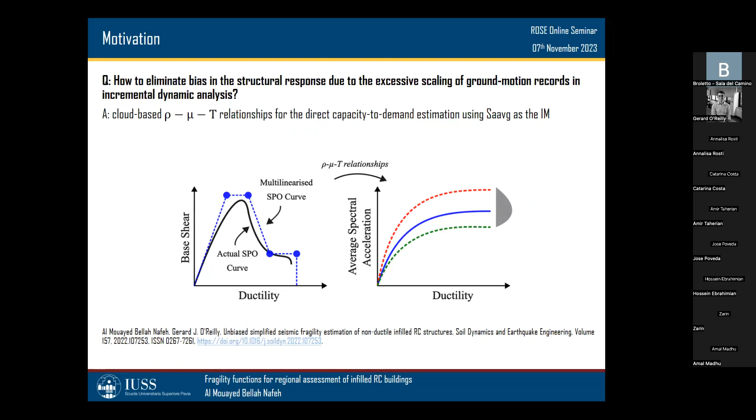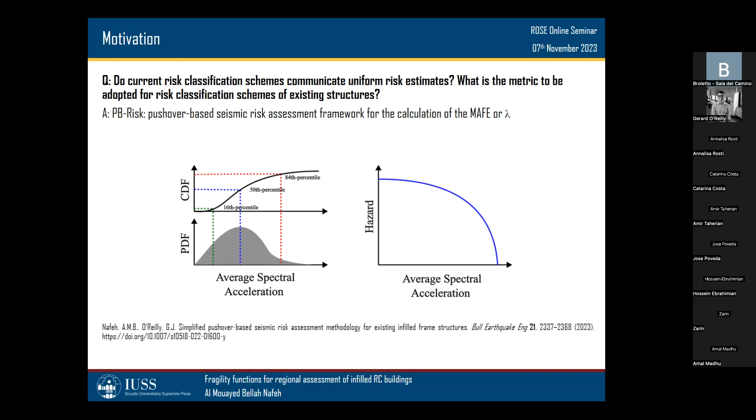The answer is no, they do not communicate uniform risk estimates due to the implemented force-based quantities, such as PGA capacity over PGA demand, in some of the guidelines. So we tried to remedy this by deriving a simplified pushover-based framework named PB-risk for the estimation of seismic risk, which is expressed in terms of the mean annual frequency of exceedance. And this integrates the average spectral acceleration, which I will call average SA from now on, as the interface between vulnerability and hazard.

The third question was, can we estimate robustly and more efficiently the direct economic losses due to earthquake events? We derived a simplified loss assessment procedure termed PB-loss, which integrates generalized story loss functions with the previous tool and framework for the direct estimation of seismic losses. These three procedures have demonstrated an acceptable trade-off between accuracy and computational demand, and most importantly, consistency and reliability.

But what do they all have in common? The common factor was the SA average as the main intensity measure. It was always considered as the interface between hazard and vulnerability.

The average SA was first introduced in the early 2000s as an efficient intensity measure for response prediction. Ever since, many studies have pointed out its high efficiency, sufficiency, and practicality properties. It is defined as a geometric mean of the spectral accelerations at a set of oscillator periods of interest, considered to be appropriate for estimating multiple structural response metrics that are critical for risk assessment and loss estimation of the structure.

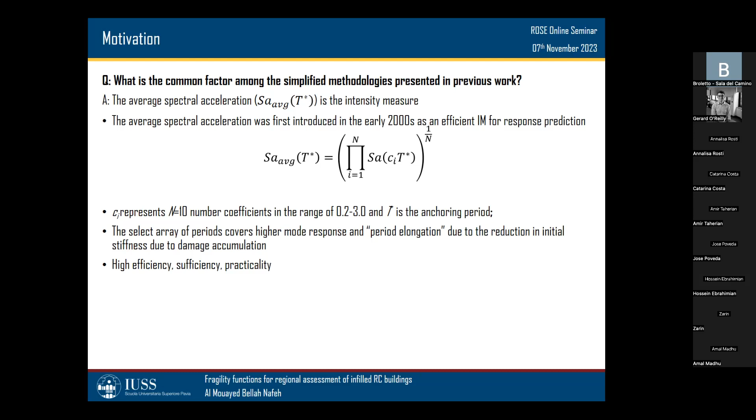So the question today is, can we derive reliable analytical fragility functions for the regional assessment of infilled RC frame buildings using average SA?

To get started, just a bit of setting out the groundwork here with general notions. Fragility curves or functions quantify the exceedance probability of any structural demand-based performance level or limit state as a function of the ground shaking intensity. This could be PGA, SA at T1, or average SA.

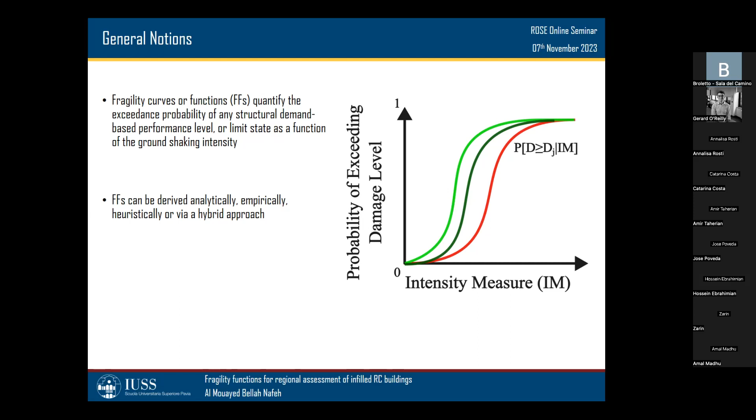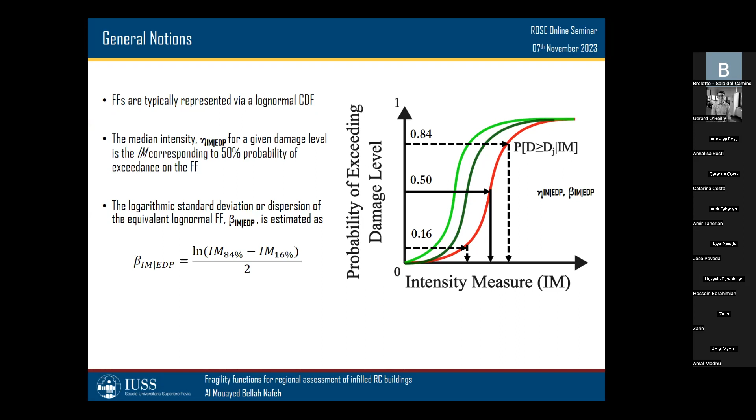Fragility functions are derived either analytically, empirically, heuristically through expert judgment, or via a hybrid approach. These fragility functions are typically represented via a log-normal cumulative distribution function with a median intensity and a logarithmic standard deviation, or dispersion.

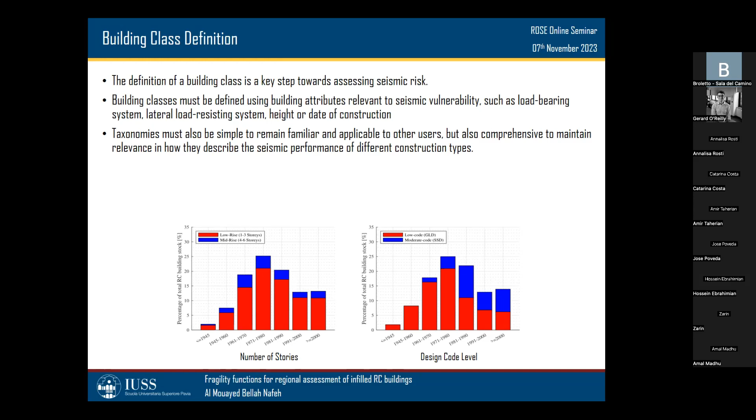A key step in the derivation of analytical fragility functions first requires the definition of building classes. Building classes and taxonomies must be defined using building attributes that are relevant to seismic vulnerability, such as load-bearing system, height, or date of construction. Taxonomies must also be simple to remain familiar and applicable to other users, but also comprehensive enough to maintain relevance in how they describe seismic performance of different construction types.

Based on national census data for Italy, we have identified 4 building classes prominent within the regional building stock, namely low-code low-rise, low-code mid-rise, moderate-code low-rise, and moderate-code mid-rise infilled RC buildings. These building classes were identified based on two prominent features, as you might have guessed: the number of stories and the design code level.

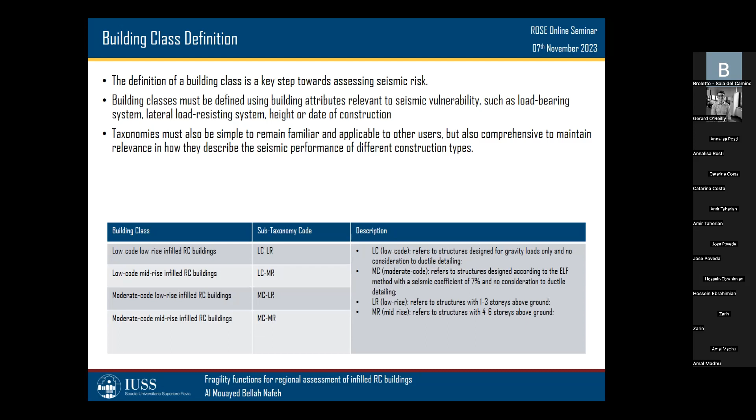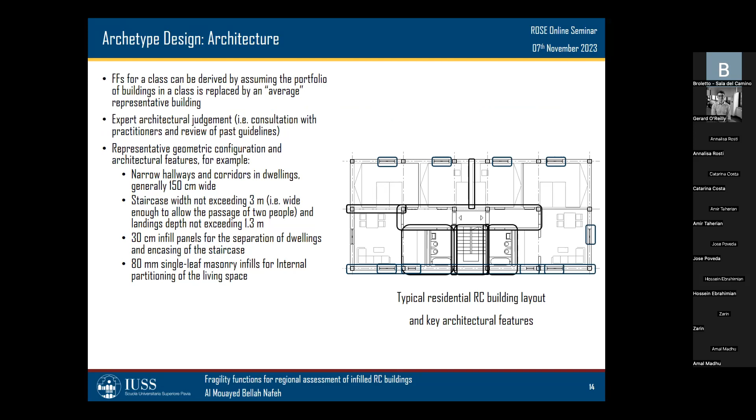After identifying our building classes, assessing the seismic performance of structures generally involves analyzing numerical models referred to as archetype building models. Archetype models are based on essential aspects, and these aspects should consider a wide range of key architectural features representative of the regional context and the corresponding design practices: the gravity and lateral load-bearing structural system, variability in material properties, occupancy type, intended use, building height, elevation, and plan configuration, etc.

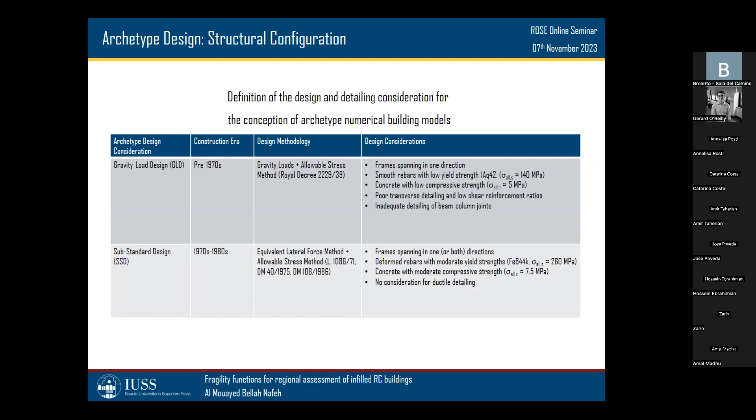Therefore, for this study, we used the database of archetype building models for infilled RC frame structures, which was previously developed in previous studies. This database considers two temporal design practices, namely pre-1970s or low-code, where buildings were designed to resist gravity loads only with no consideration to ductile detailing, and post-1970s or moderate-code, where seismic design was carried out with respect to the equivalent lateral force method, where a lateral force coefficient of about 7 to 10% was typically considered depending on the seismic zonation we're in. For this application, a seismic coefficient of 7% was considered.

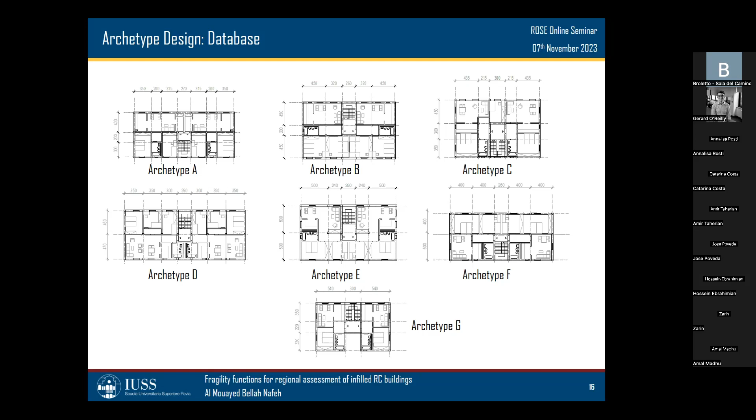Numerical models of the archetypes were developed in OpenSees using a 3-dimensional lumped plasticity approach. Empirical calibrations from various sources were employed to determine strength, deformation capacities, and hysteresis parameters for different member types such as beams, columns, beam-column joints, and infill panels.

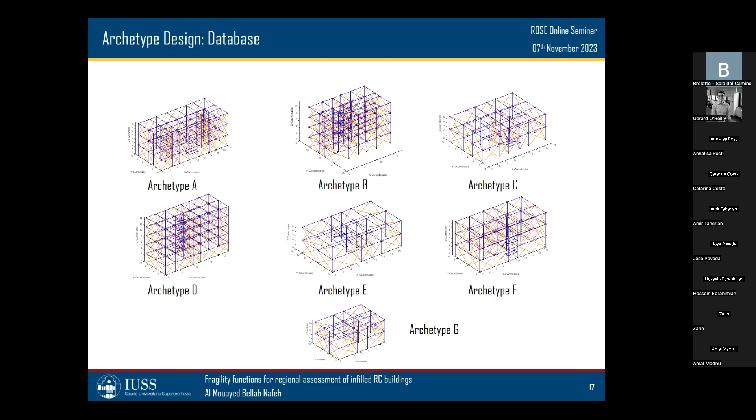Following the definition of numerical models and before running any sort of analysis, probabilistic seismic hazard assessment must be carried out to characterize earthquake rupture sources at a specific site of interest and to identify the relationship between these rupture characteristics and the intensity of ground shaking via an intensity measure.

OpenQuake was used to conduct PSHA, where the annual rate of exceeding an average SA level at a given site is obtained. In this study, the archetype buildings were assumed to be located fictitiously in the city of L'Aquila in Italy. The most recent European seismic hazard model, ESHM20 for short, was used with the site characteristics presented by Mori et al. to estimate the hazard curves for different definitions of the average spectral acceleration.

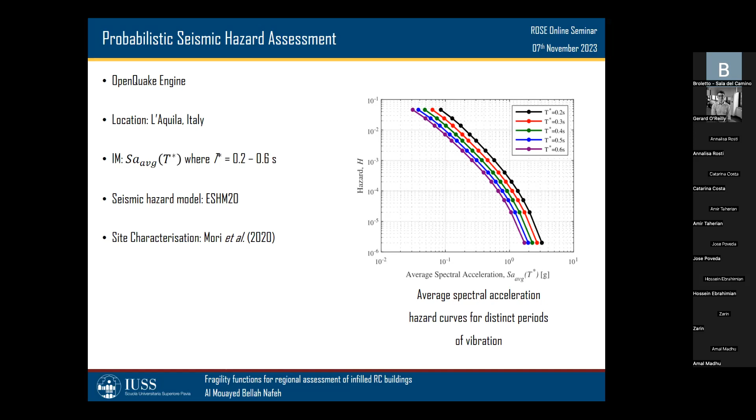Next, the derivation of fragility functions requires the ability to accurately quantify the exceedance of any structural demand-based damage state. Damage states are widely used in seismic risk applications to relate observed structural damage to consequences like building functionality, economic losses, and possible casualties. In practice-based applications, damage states are typically referred to as limit states and are triggered by several potential factors, both on a local and global level.

This can be either global displacement-based, local deformation-based, or local strength-based criteria. For example, the Italian National Code, or NTC 2018, identifies 4 limit states based on the lateral capacity of the main structural system.

Since the typology under consideration in this work is non-ductile infilled RC-frame buildings, these damage states are also impacted by the premature failure of the infill panels and the degradation in strength due to the in-plane, out-of-plane interaction. However, in this study, we focused mainly on the in-plane failure of the masonry panels, and experimental tests carried out by Kurukulasuriya et al. demonstrated that for infilled RC-frame buildings, the initial damage states are governed by the in-plane drifts sustained by the infill panels.

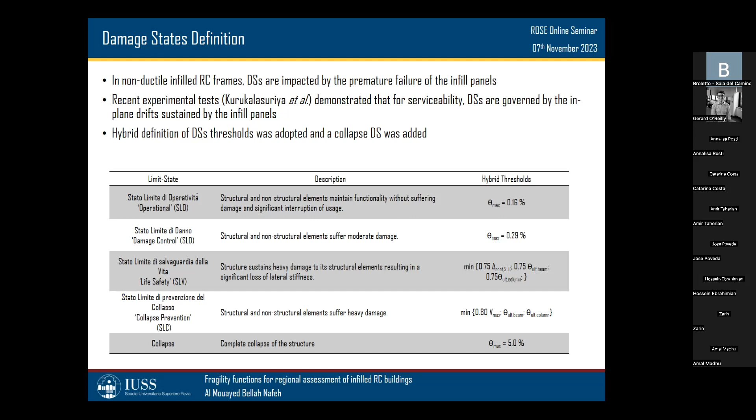These correspond to story drift values of 0.16% and 0.29% for the operational and damage limitation limit states. To account for this, a hybrid definition of damage state thresholds was adopted in this study, where the findings of Kurukulasuriya et al. were adopted for the operational and damage limitation limit states, and NTC 18-based guidelines were adopted for the definition of the life safety and the collapse prevention limit states. An additional collapse limit state was considered, where complete structural collapse is expected, taken to be when 5% story drift is exceeded in nonlinear dynamic analysis.

A series of multiple stripe analysis using hazard consistent ground motion records at discrete intensity levels was carried out to individually characterize the nonlinear dynamic response of the archetype buildings. But before that, hazard disaggregation analysis following PSHA was carried out to identify the most representative rupture scenarios for a given IM and return period.

A suite of 25 records per intensity was selected using the toolbox for ground motion selection and processing, EzGM. This was carried out considering 5 conditioning periods, T star, for average SA, which were in the range of the geometric mean of the first mode periods of vibration of each building. 9 intensity levels corresponding to return periods of 22 to 4,975 years were analyzed to characterize structural response from initial damage all the way to global structural collapse, while keeping the scaling factor threshold for record selection at 2.

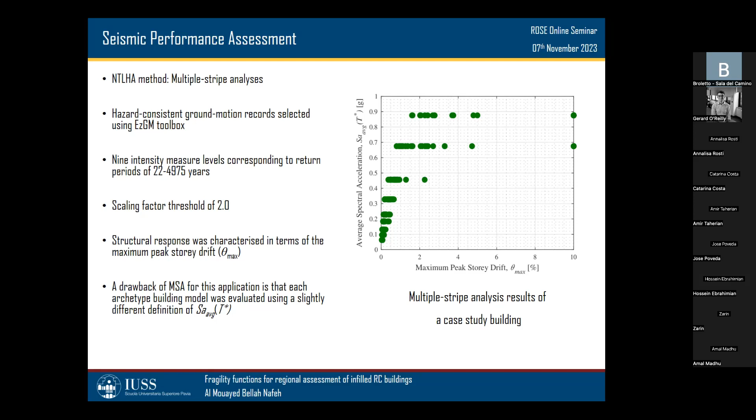The analysis was carried out. However, a drawback of multiple stripe analysis within this context and this application is that each archetype building model was evaluated using a slightly different definition of average SA. To remedy this, we've opted to use a single definition of the conditioning period for buildings belonging to the same class. This enables us to characterize an entire building class under a single definition of average SA.

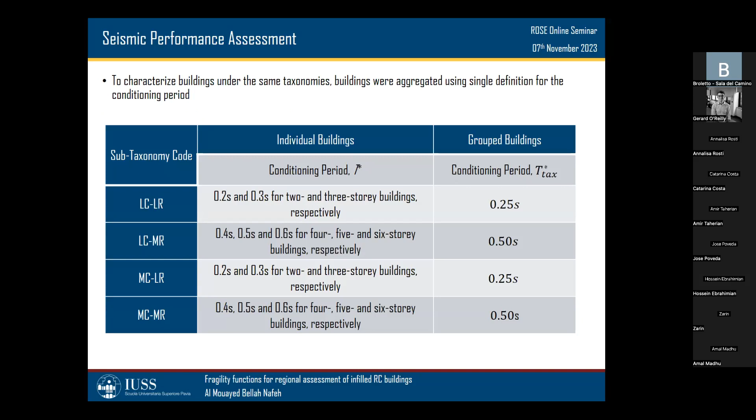As a result of the building grouping, results of MSA carried out on individual buildings would change, given the shift in the intensity measure definition from multiple definitions of average SA to a single one. Therefore, new spectral intensities should be identified. We try to do that without rerunning the analysis by simply calculating the intensities from the spectra of each individual ground motion record, and no changes to the EDP values were necessary.

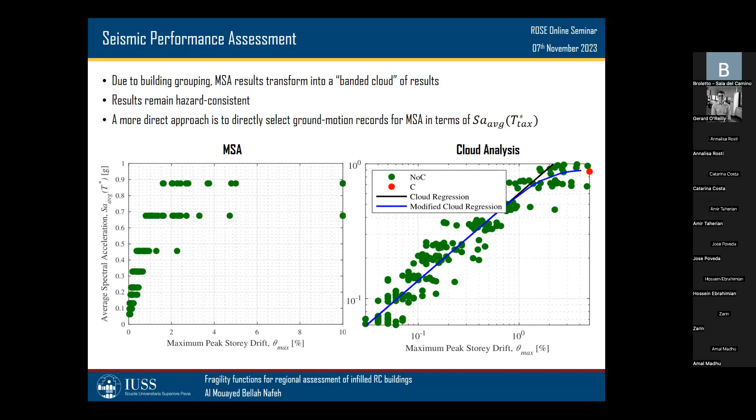Now, to identify the median intensity and associated dispersion corresponding to a demand-based threshold for a single building case, our application becomes similar to that of cloud analysis, where a linear regression in the log space is carried out to identify an IM given EDP relationship, and the median intensity is obtained by intersecting graphically the regressed line with a vertical line representing the demand-based threshold and reading off the value on the y-axis. The associated dispersion, or in this case, the record-to-record variability, is simply the error in the fitted regression.

On an asset class scale, the previous exercise is repeated until all median intensities corresponding to all damaged states for all buildings are collected. The seismic intensity of a building class for a given damage state is simply the mean of individual seismic intensities at that damage state.

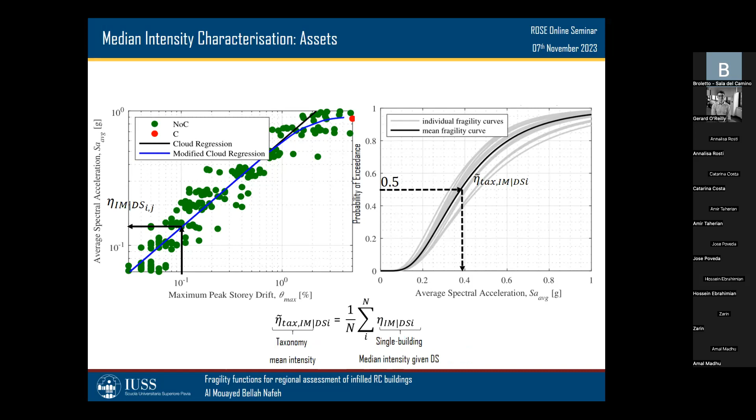As far as uncertainties are concerned, the seismic performance assessment of any given structural typology requires due consideration to both aleatory and epistemic sources of uncertainty. In the study, the overall dispersion associated with the mean log normal fragility functions of each taxonomy was derived as per the law of total variance by considering the intra-building, inter-building variabilities, and the modeling uncertainty.

The intra-building variability considers the overall record-to-record variability, and this simply becomes the arithmetic mean of the observed record-to-record variability of all the buildings within a class, and is therefore a constant value since the error associated with the regression is itself a constant value.

The inter-building variability is simply put the deviation of individual median intensities of each building within a class from the mean seismic intensity for any given limit state. So it's basically how far the medians are with respect to the mean intensity that is characterizing our building class at that particular damage state.

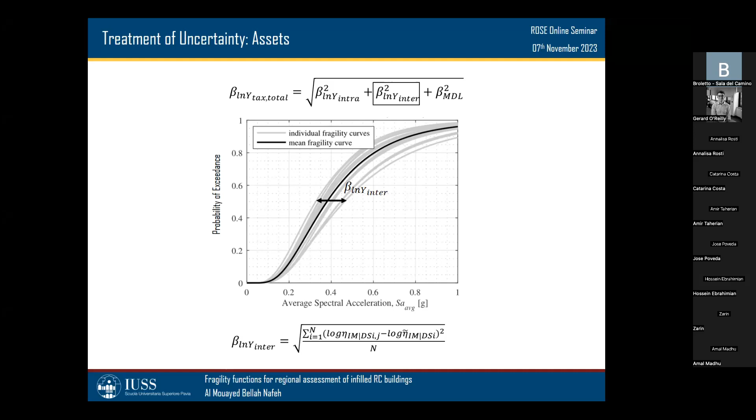The last source of uncertainty is associated with numerical modeling and the parameter values used in the modeling process, which can be related to material property, geometric configuration, and other numerical assumptions.

To quantify the propagation of modeling parameter type uncertainty to the overall dispersion, a value of 0.34 was assumed according to a study conducted by O'Reilly and Sullivan for 2 to 6 story infilled RC buildings.

After identifying the key components of fragility functions, analytical fragility functions can now be derived following the assumption of log normality, which implies that the IM values of ground motions causing damage state exceedances are log normally distributed. This is a common assumption demonstrated in various studies throughout the literature, and the functions are illustrated on this slide.

Verifying analytical functions with past earthquake events is a crucial step in the development of these functions in earthquake engineering. The verification process aims to assess the robustness of what we just derived in casting future damage predictions.

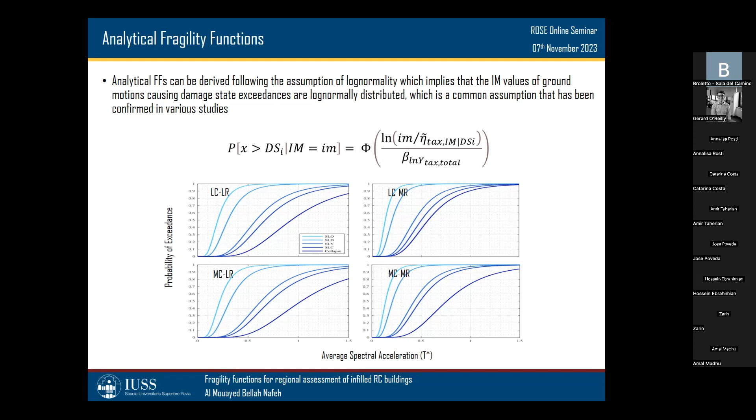To do so, empirical fragility functions obtained from observed damage after the occurrence of a significant earthquake event are invaluable.

Empirical fragility functions, similar to analytical ones, are models derived from pairs of observed damage and intensity data for buildings and infrastructure. On the x-axis, we indirectly have the intensity measure values at points of interest, obtained either through field surveys or numerical simulations using ground motion models. The y-axis indirectly relates to the damage data collected for a group of surveyed and spatially distributed exposed assets.

Additionally, verification events should be statistically suitable and significant. This means that a wide range of ground motion intensities and scenarios should be covered to ensure the robustness of fragility functions across different conditions.

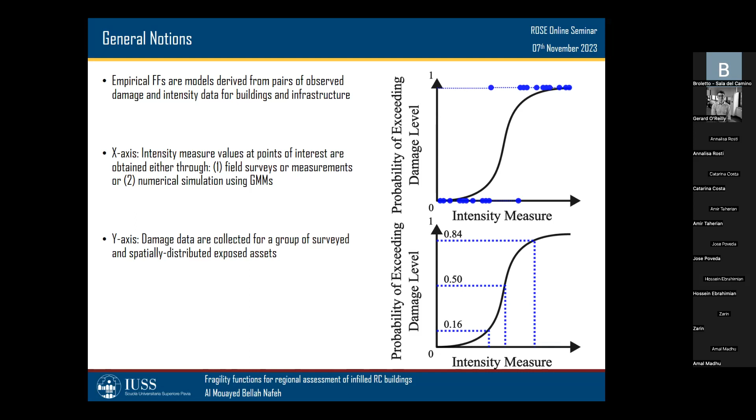In this study, two seismic sequences were considered. The first being the magnitude 6.2 Umbria Marche earthquake of 1997, which in its aftermath, unfortunately, took the lives of 11 people, left hundreds injured, and at least 80,000 displaced.

The second considered event is the magnitude 6.3 L'Aquila event of 2009, with almost 308 fatalities, 1,500 injured, almost 66,000 displaced, and costing $16 billion in economic losses.

The first step in deriving empirical fragility functions is to map the intensities associated with the rupture scenario that occurred. For this purpose, ground motion fields, or GMFs, are derived following an earthquake event using ground motion models, or GMMs. GMFs associated with significant events are very important to our application as they provide assessments of potential damage and community exposure.

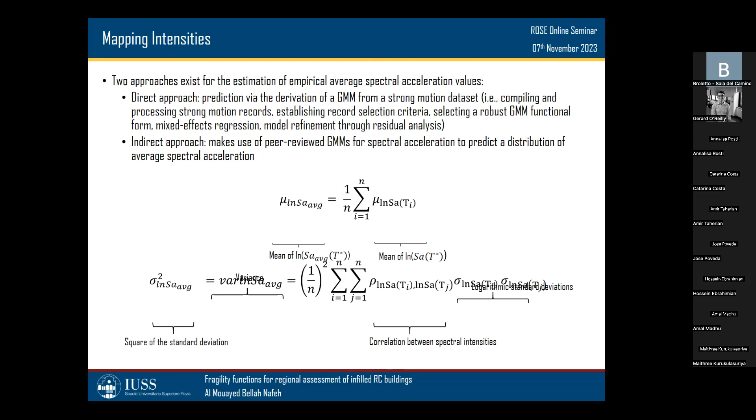If we dissect the mean of the logarithm of average SA into multiple spectral acceleration values, we refer to the GMM proposed by Bindi et al., which was used to evaluate these spectral intensities, as it was derived to estimate them at distinct periods ranging from 0.04 to 2 seconds. The GMM also allows estimation of ground shaking intensities such as PGA and SA, corresponding to magnitude range of 4 to 6.9, which our events fall within, and distances of up to 200 kilometers. The prediction using ground motion models generally, and Bindi et al. specifically, is based on earthquake magnitude, source-to-site distance, local site conditions, and fault mechanism functions.

But before applying any ground motion model to produce ground motion fields, careful comparison of observations to various numbers of standard deviations on either side of the mean prediction is necessary. To help account for this deviation, a new technique titled ground motion model conditioning can provide additional constraints on the ground shaking estimates in the region affected by the earthquake.

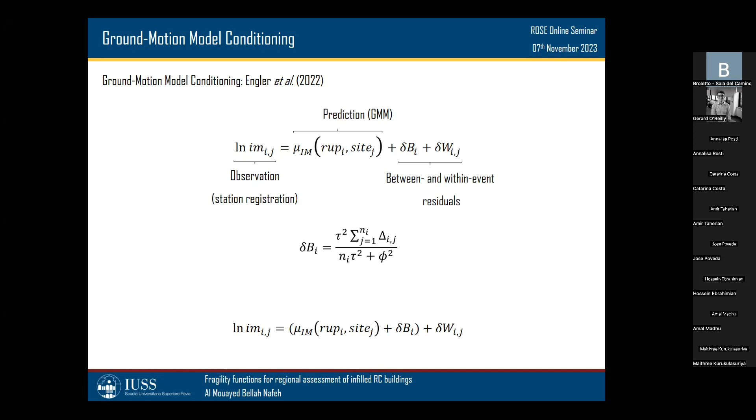This is done using the ground motion recordings from stations, or what is termed ground truth. The conditioning of the ground shaking is based on the methodology developed by Engler et al. 2022, which preserves the partition of the within-event and between-event residuals, thus enabling more accurate propagation of uncertainties through a Monte Carlo simulation approach.

So for each IM of interest, mixed effects residuals are computed using the following formulation, commonly referred to as residual partitioning, where the between-event residual is recomputed using the recorded data and reinserted into the equation above. The GMM then becomes an event-adjusted ground motion model that we can use to simulate realistic intensities given the rupture scenario that has occurred in the past, following the applied constraints.

Mu IM and delta B are now grouped into what is commonly referred to as an event-adjusted mean, and delta W represents the residual between the observations and the event-adjusted mean. The GMM conditioning may not always inflict significant changes on the non-conditioned GMM, yet it still remains a suitable step to carry out to inject some reality through instrumental recordings into the prediction.

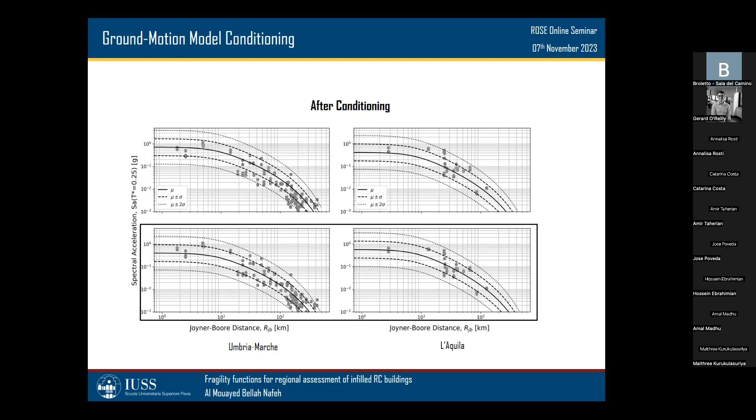Moving on to spatial correlations. Spatial dependence among ground motion typically impacts predicted consequences to spatially distributed assets. This correlation considers the spatial dependence in the joint probability distribution function of an intensity measure given a rupture scenario. It was observed through many studies that considering spatial correlation yields the most accurate estimates. Hence, a model that does not account for spatial correlation may imply that larger than median motions would occur at individual locations if considered independently.

The spatial correlation model for the average SA that was derived by Heresi and Miranda in 2021 was adopted in this study. Several phenomena associated with earthquake rupture and wave propagation can produce spatial correlation in the within-event residuals. This can be due to the simplicity in the source description of ground motion models, site effects, geomorphological conditions of the considered regions, etc.

Having assembled the key components for generating ground motion fields, the intensity at each site within a controlled polygon or grid, for a given rupture event, is simulated using a multivariate normal distribution for the logarithm of the intensity measure, in this case, the SAs.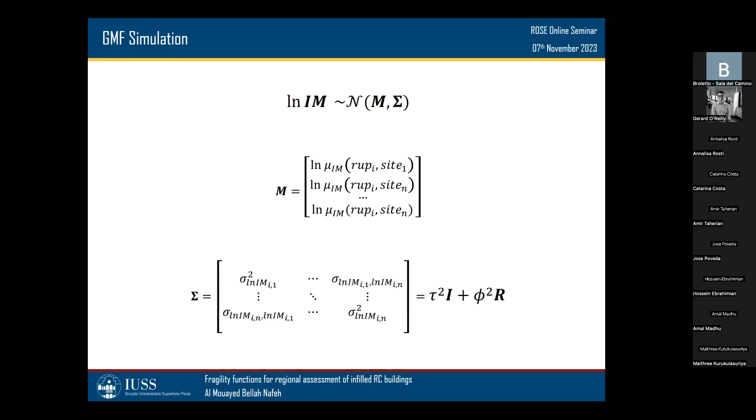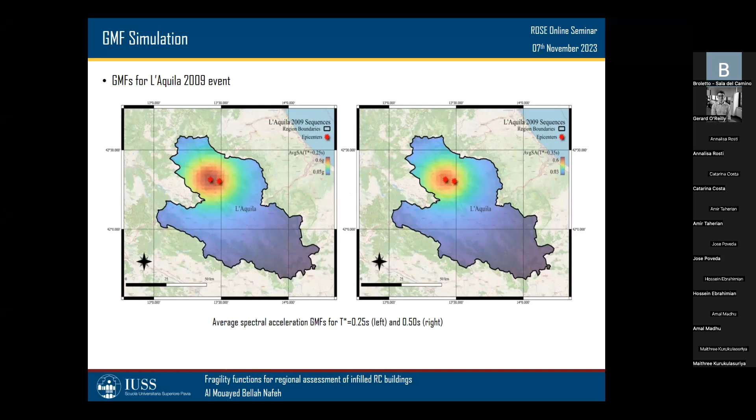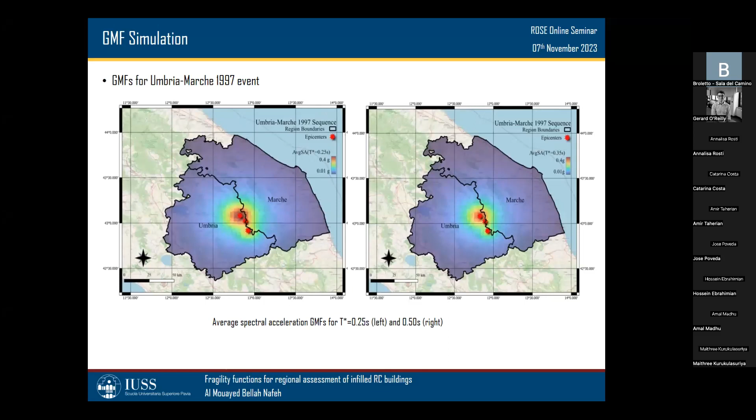Now, the ground motion fields corresponding to the two case study sequences were derived, where the average SA fields are plotted alongside the epicenters of the earthquake events considered within the sequence. These intensity fields represent the mean ground shaking intensity corresponding to 10,000 simulations that were carried out, demonstrating the ground motion fields for the L'Aquila event and for the Umbria Marche event.

I deserve the water break.

Now, the second component of empirical fragility functions is to assemble empirical damage observations corresponding to the considered event. This data represents an invaluable source of information. Over the last 50 years, a notable amount of data relevant to post-earthquake damage to existing buildings was collected following earthquake events in Italy. This data was stored in a database of observed damage called the DADO. DADO is an IT platform and database which includes information on the structural characteristics and the observed damage to buildings inspected after the most relevant seismic events that occurred in Italy from the Friuli 1976 earthquake onwards.

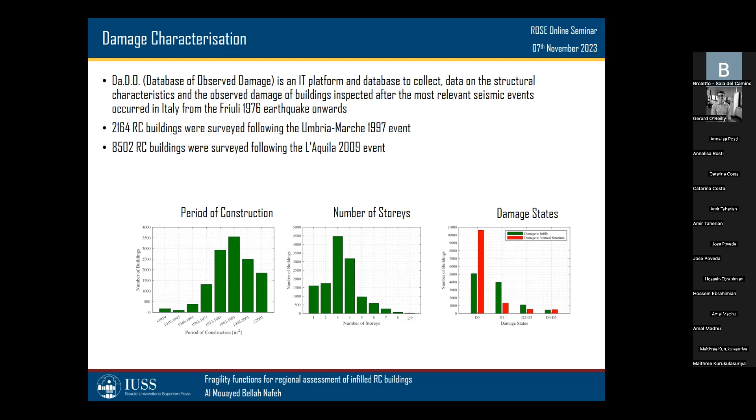The DADO database includes information on 2,164 RC buildings following the Umbria Marche 1997 event, and information on about 8,500 RC buildings following the L'Aquila 2009 event.

The damage state data were collected according to the AeDES survey, which is a subset of the European macroseismic scale, or EMS 98. AeDES identifies four damage states composed of 6 damage levels, ranging from D0 to D5.

Before 1997, damage data were collected mainly with regards to the state of the vertical structure, such as in the Umbria Marche event. Following 1997, new extensive damage categories were included in the survey to reflect the state of non-structural elements that can be present in a building, such as infilled panels.

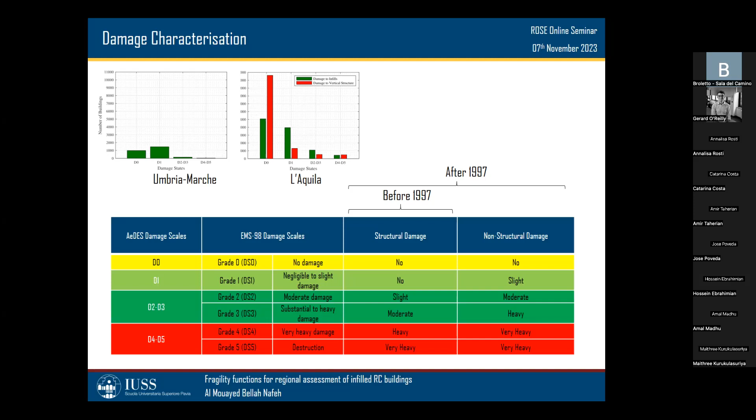However, in order to adequately validate analytical fragility functions with empirical fragility functions, an equivalency is required between the hybrid limit states established in the previous section and the AeDES damage states, to help provide a more comprehensive comparison between empirical and analytical fragility functions, and to be able to say that we're comparing apples with apples in this context. Therefore, some assumptions must be made.

In the study, the hybrid limit states adopted in the analytical fragility functions were related to the AeDES damage states as illustrated in this table. For example, we assume that D0, or the undamaged limit state, corresponds to the operational limit state in the hybrid approach. D4, for example, corresponds to the collapse prevention limit state in the hybrid limit state, and so on.

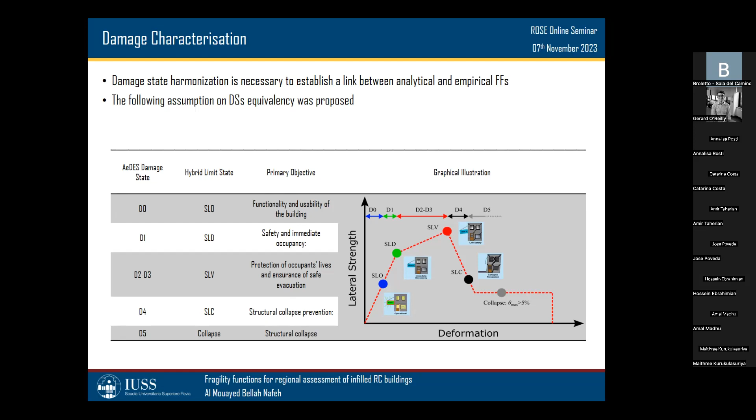Having characterized the information required for both axes on the fragility function, we now possess all the information required to fit our empirical fragility function. We're only missing the techniques for deriving such empirical fragility functions.

Given the availability of building-by-building data, we assume a Bernoulli distribution for characterizing the random component of the statistical model. This is basically the component corresponding to the y-axis on the fragility function. Y given IM, in this case, indicates whether an asset i is in damage state j. The outcome of the Bernoulli distribution is a binary outcome, meaning that for a certain damage level, all exposed assets

with an observed damage level that is D less than DI will have a probability equal to 0. For a certain damage level, all exposed assets with an observed damage level D greater than DI will have an assigned probability equal to unity. This adoption of the binary Bernoulli distribution allows for avoiding aggregation of damage data, which may introduce uncertainty and overlap in the fragility functions.

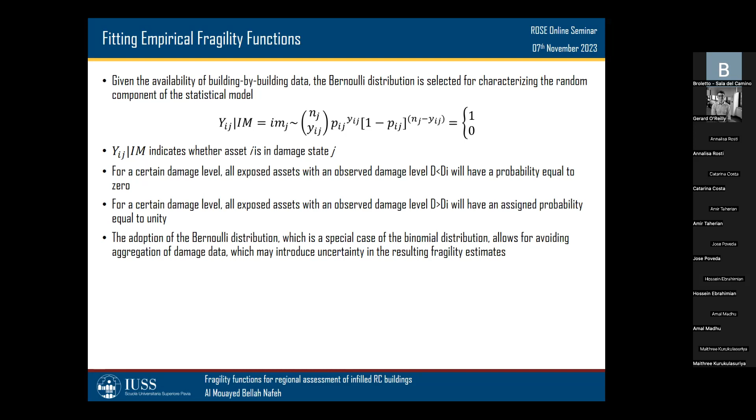Now, for the derivation of fragility functions, a further step requires an appropriate statistical model and fitting technique to approximate the observational data as a function of the ground motion severity or intensity measure level. As such, the cumulative log-normal distribution, similar to that adopted in the analytical fragility function, is adopted for describing the probability of exceeding a damage level as a function of the seismic intensity measure, where fragility functions are simultaneously fitted via a maximum likelihood estimate approach, where the optimal parameters, in this case the median intensity and the associated dispersion, result from maximizing the logarithm of the likelihood function.

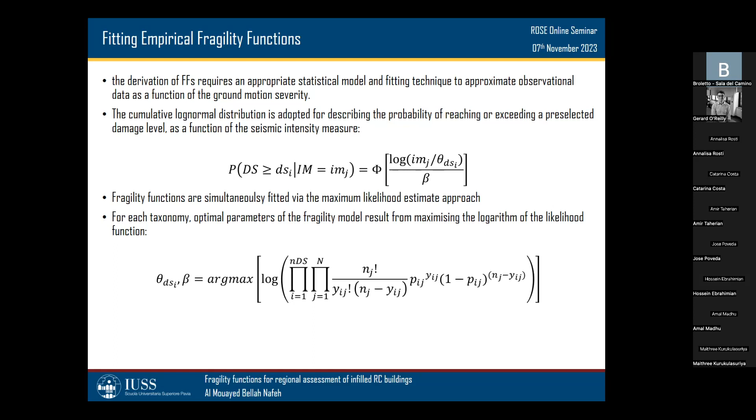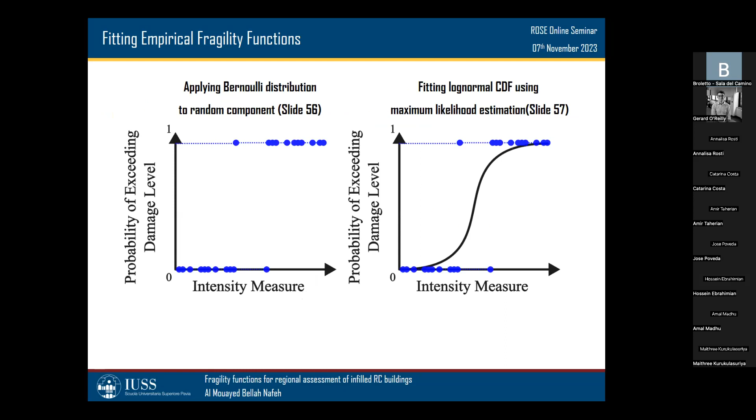Now you might be thinking, we've identified 5 damage states. Why are we seeing 4? This is the result of not having enough significant damage data corresponding to collapse in the database, unfortunately, so we cannot draw any conclusions with regards to the ultimate limit state, that is collapse.

As far as verification and conclusions, the first major takeaway of this study was the reduction of uncertainty in fragility functions that was clearly demonstrated. This is crucial for improving the accuracy and reliability in seismic risk applications. Reducing uncertainty was demonstrated to be achieved using more efficient IMs, such as average SA, and choosing appropriate IMs is highlighted to be beneficial, as the choice directly influences the robustness of the fragility functions.

The influence of the IM choice on the associated uncertainty is demonstrated in this figure, where we can see the efficiency that average SA has demonstrated with respect to other conventional IMs, such as PGA and SAT. These correspond to the dispersion associated with the empirical fragility functions corresponding to other IMs. A major improvement in efficiency was demonstrated, particularly at moderate to high damage states, such as damage limitation, life safety, and collapse prevention, where the concentration of damage initiates and propagates, and where we tend to outgrow the elastic response.

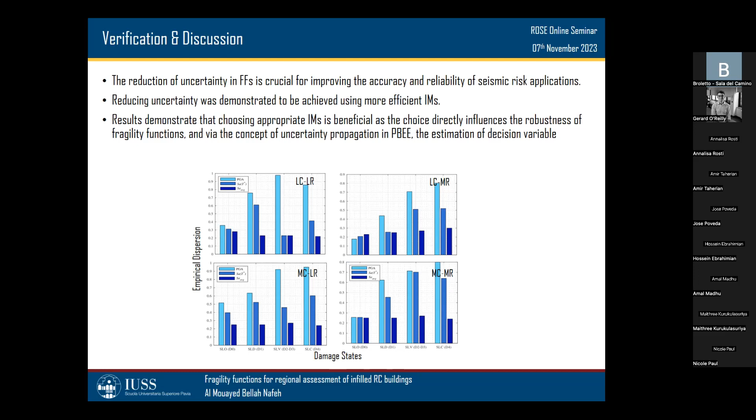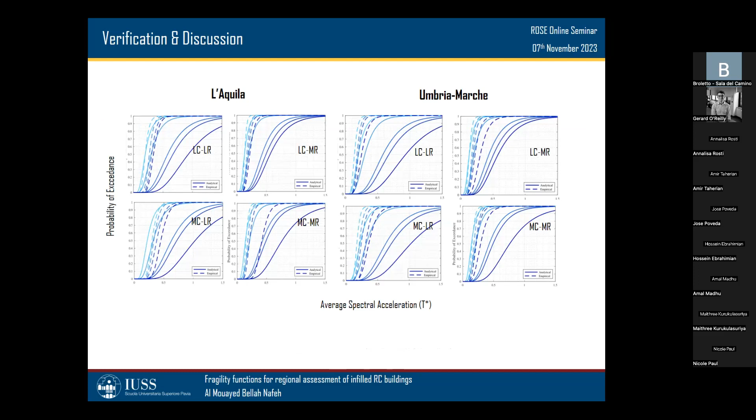An acceptable prediction in the estimation of the seismic intensities associated with the serviceability limit states, in this case SLO, and the damage limitation limit state, was observed. However, a consistent overestimation of the seismic intensities associated with the remaining damage states was observed.

Now, this can be due to many sources of error. Damage accumulation in buildings following earthquake sequences is a cause. The damage data was collected after the conclusion of the earthquake sequences in both Umbria Marche and L'Aquila. This meant the data itself was not time-stamped, which means everything was collected after buildings have accumulated a lot of damage from the previous events within those sequences.

Another source of error could be the assumptions associated with the anchoring period for the empirical fragility functions. We cannot accurately identify the conditioning period of a building if we just see it outside the window. We cannot tell, but we are assuming that our analytical and empirical fragility functions have some sort of correlation between their periods, which may result in errors in the prediction.

The uncertainty in the damage state definition between empirical and analytical fragility functions is a big assumption, and this requires a lot of accuracy and a lot of guts to actually come up with. In my opinion, this causes a lot of the discrepancies that we find between the two fragility functions, empirical and analytical. Last but not least, the bias in the data collection itself, due to the differences in damage state perception between one expert and another, can be another source of uncertainty.

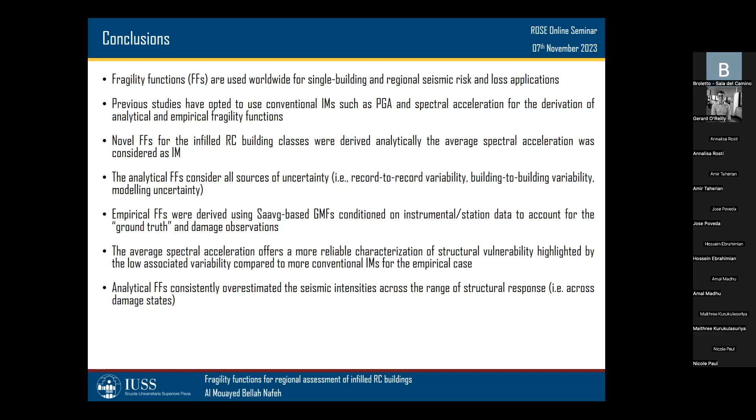And this opens up a perspective for future work. What can we do to figure out what is going on? What is this discrepancy coming from between analytical and empirical fragility functions?

Some items that we can carry out could be sensitivity analysis on the period range that is associated with the average spectral acceleration, simulation of ground motion fields, and testing using more ground motion models. In this study, we've only used a model that seemed to be representative of the Italian tectonic regime, the ITA, but it is worth experimenting with more ground motion models.

Now, running nonlinear time history analysis, accounting for damage accumulation, which means running our archetype models in a main shock aftershock sequence. But this changes the scope of this study. We're not looking at state-dependent fragility functions in this case.

More importantly, the characterization of a more adequate relationship between code-based limit states and empirical damage states is a must. We have to be able to find some sort of harmonization between the two scales so that we can say we're comparing apples to apples. Because despite all the hypotheses and assumptions that we made throughout this study, we seem to be a bit comparing apples and oranges.